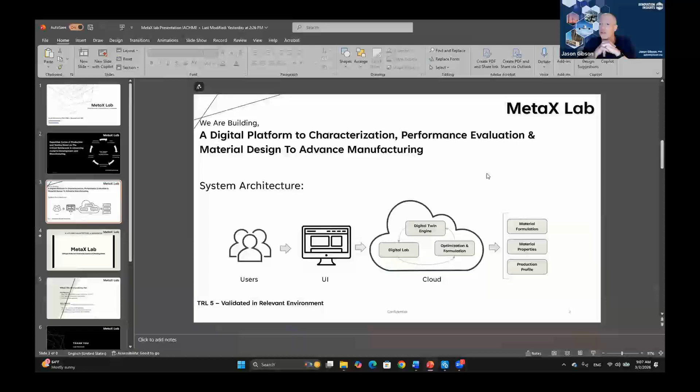Sorry to interrupt, but we don't see any of your slides. Did you want to share your screen? I am sharing my screen. Oh, you have more than one screen. Sometimes that's the issue. Thank you for pointing that out. Do you see my screen all right now? We do, we just see the whole thing. If you put it in presentation mode, we'll see. There we go. Looks good. Perfect. Thank you. Sorry, my computer has so many things running, even though I closed most of them, but this makes it a little slow.

The platform we are developing aims to enable industry users to digitally predict the properties and evaluate the performance of the material. In addition, it enables them to develop new formulations or optimize the manufacturing process, and see and analyze the output before heavily investing in the physical process. We estimate this platform can remove 70% of the manual work currently being done, expedite the whole process, and easily become part of the current workflow in the manufacturing process.

The architecture of the platform is modular, meaning we don't have a generalized model. We have individual modules developed for each material family and each test using advanced computational techniques. The good news is the user doesn't need any skill in simulation and modeling, as the modules are designed to work automatically and provide the required outcome. Users only need to communicate with these modules through a very simple UI, which I'll show you in the next slide.

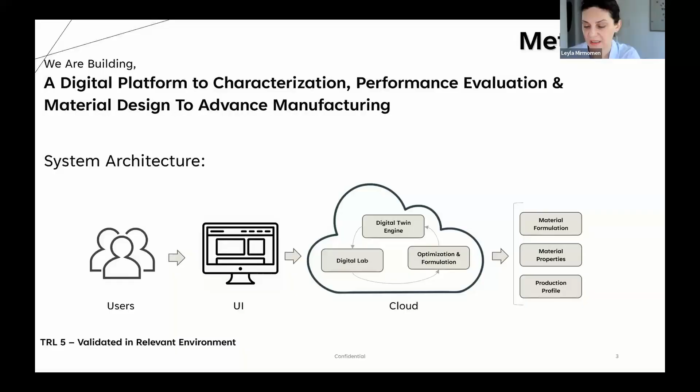Currently we are at TRL5 of development, with focus on reinforced composite and self-healing composite and mechanical property lab. All the modules developed have been validated against experimental data. I would like to stop talking abstractly and actually show you a short video demo of how the tool works, to give you a better idea of what I'm talking about.

Material development and characterization are slow, expensive, and unpredictable. MetaX Lab changes that. In this short demo, you'll see how our intelligent platform builds a digital twin of the material by predicting its microstructure and properties, simulating its performance, and generating complete engineering reports instantly and automatically. This demo focuses on particle-reinforced thermoset composites, including rigid particles and chopped fibers with aspect ratios under 5.

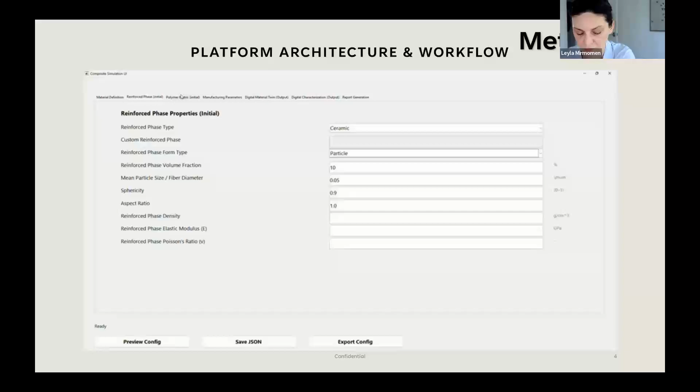With that material system defined, the workflow begins with material definition, where the basic identity of the composite is established. From this point forward, MetaX Lab's multi-layer computational engine, built on the physics and chemistry of cure kinetics, network formation, and polymer behavior, configures the workflow automatically. The next step defines the reinforced phase, where the user selects the reinforcement type and inputs properties such as geometry, stiffness, and volume fraction. Based on these inputs, the platform activates morphology-dependent formulations, reinforcement-matrix interaction models, and dispersion and packing rules that determine microstructural behavior. Next, the polymer matrix chemistry is selected.

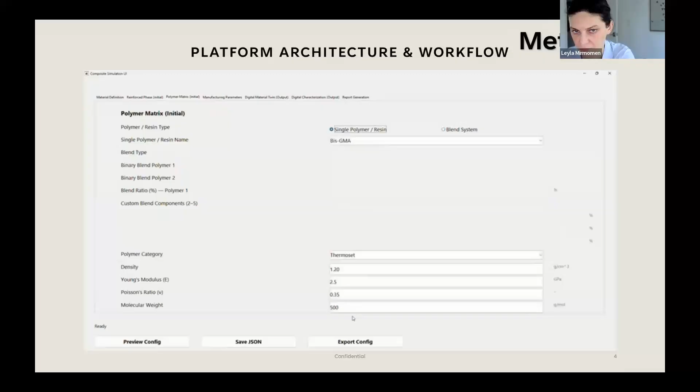This single input triggers the physics engine responsible for cure kinetics, viscosity evolution, modulus development, and chemistry-dependent constitutive behavior. User input is intentionally minimal: you provide the chemistry, and MetaX Lab manages the full multi-layer physics. Manufacturing and curing parameters are then defined, and the platform uses this information to update material behavior throughout the curing process, continuously evolving modulus, interactions, and microstructure as the polymer transitions from uncured to fully cured.

MetaX Lab then constructs a high-fidelity digital twin of the material. Here, the user selects the intrinsic properties and microstructural features to include. The resulting digital twin represents the final microstructure, intrinsic matrix properties, and composite properties at full conversion, and can also capture how these properties evolve throughout processing.

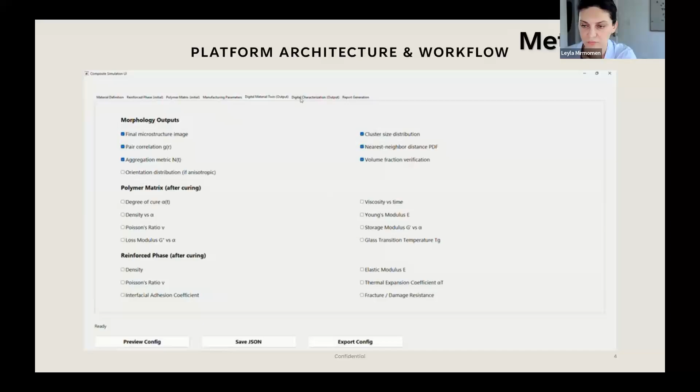The digital twin proceeds to digital characterization, which functions as a virtual testing laboratory. Each test is a digital reconstruction of the corresponding ASTM standard. Users can perform tensile, flexural, compression, shear, fatigue, or fracture tests and define loading rate, environment, temperature, and nonlinear options. MetaX Lab automatically applies the appropriate boundary conditions and loading profiles, runs the digital test, and outputs performance metrics.

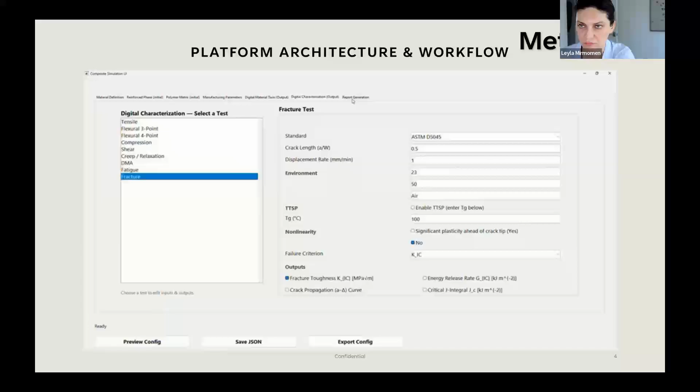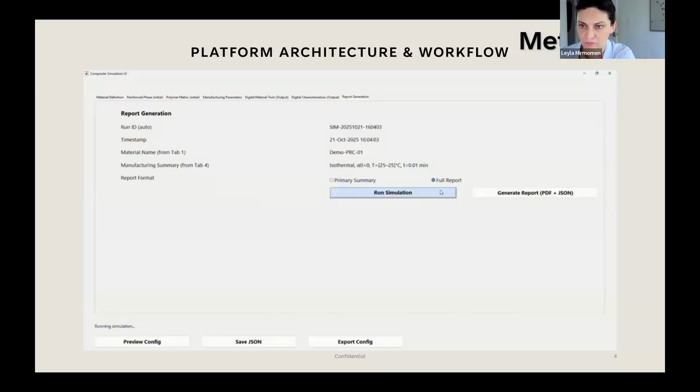Here, the user runs the full simulation and can generate two reports. The first is the morphology report. It visualizes the simulated microstructure and quantifies particle dispersion, clustering, nearest neighbor distances, and aggregation behavior, providing a technical fingerprint of the composite morphology. The second is the full digital twin report. This combines microstructure information with intrinsic material properties and performance metrics, including flexural modulus, strength, maximum deflection, and the complete load deflection curve. All algorithms and outputs shown here have been validated against experimental datasets for this material family.

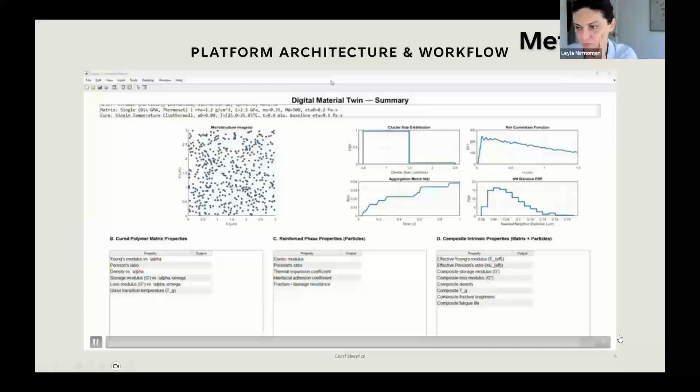Accuracy and tolerance ranges are updated continuously as new data are incorporated. MetaX Lab delivers a physics-grounded, autonomous workflow with minimal user input, enabling faster development cycles, reduced cost, and deeper insight into material behavior. Upcoming modules include a formulation design station, where target properties define the required formulation, and additional tests such as fracture toughness, further expanding the platform's capabilities.

Material development and... I'm sorry. Before I stop my talk, I just want to say that what we are looking for at this point of our development, and I hope that people who are listening find alignment with us.

All right, thanks a lot. Give me just a minute. All right, bear with me. Do you got the notes page this time, Jason? We got the notes page, so you'll need to swap it real quick, swap it again here. There you go, looks good. Perfect, thanks, Jeff.

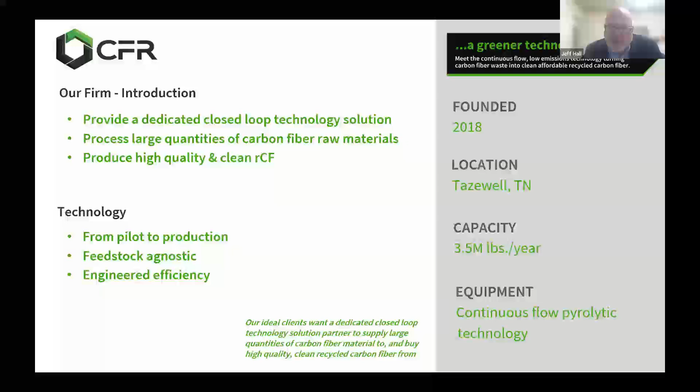That kind of leads to the supply chain side of things. So what we offer is supply chain stability. Since we have access to large amounts of domestic feedstock materials, the RCF we produce is not tied to global economic pressures. I think anybody that works with carbon fiber understands that can be a little bit of a challenge, especially faced with some of the things we're faced with right now.

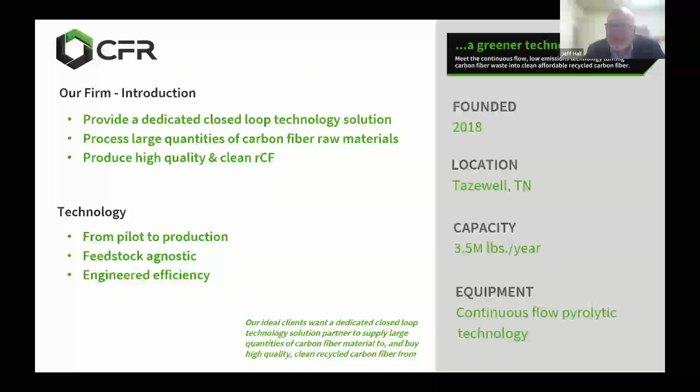And then lastly is just the scale, the sheer scale at which we operate. At our current location, we can produce north of 3 million pounds of RCF. That's 3 million pounds of material that we can recycle or more, right? But we can also produce over 3 million pounds of clean RCF that can be commercialized and then utilized for other applications.

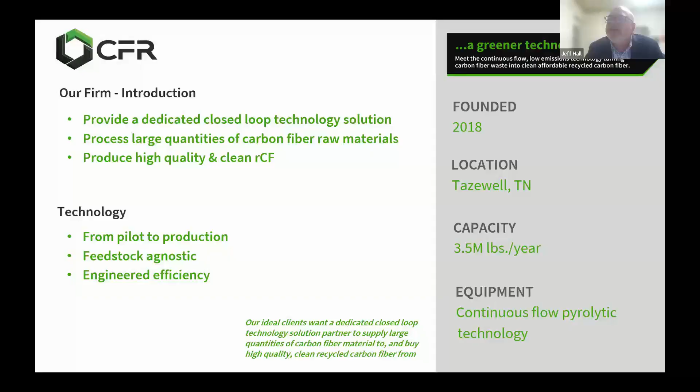So we'll kind of move over and jump into the product side of the fence, and this is where it might get tricky. Bear with me while I try to change tabs. Did that change for you guys? Okay, yep, yeah, it looks like it did. Okay, great, thank you.

So as you guys know, developing recycling solutions is a two-sided coin, right? On one side, you've got the recycling aspect, but on the other side is the commercialization of the raw material, or the material that you're getting out of the recycling piece. And you need both sides to be successful.

This material is comprised of liberated fiber from various feedstock supplies, for example, high pressure vessels, hydrogen, compressed natural gas tanks, race cars, aerospace, cured composites, a lot of the stuff that gets recycled. As far as the attributes of that material go, it maintains the attributes of the original base material.

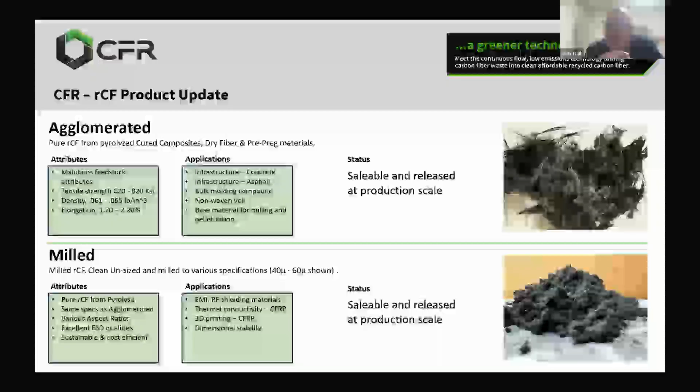So our agglomerated material can be used as-is for applications like infrastructure applications, for example fiber reinforcement for concrete and asphalt. We also use this material as the base material that we create other materials out of.

For example, if you look at the bottom of the page here, you're going to see our milled RCF. This milled RCF has all the same attributes as the agglomerated RCF, but it can be milled to various aspect ratios.

One thing that makes it unique is the fact that it has no sizing on it, which gives it fantastic EMI and RF shielding capabilities.

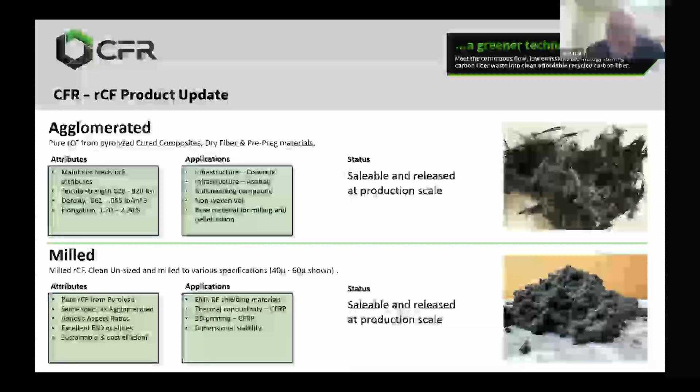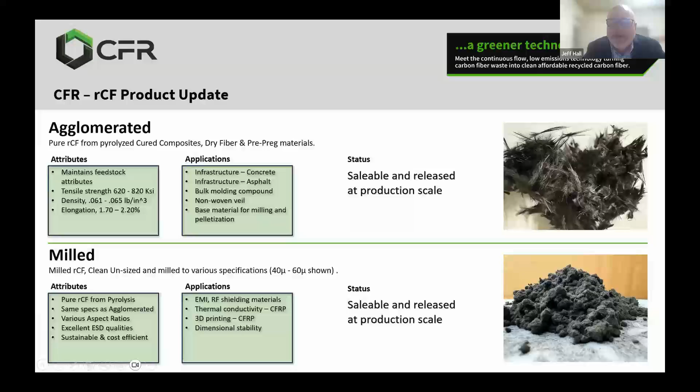We've been doing some work with Sandia National Lab that kind of reinforces that statement, and we've got some technical data that we'd be happy to provide to anybody that would like to learn a little bit more about some of those results for EMI and RF shielding.

So both of these products you see here on the page are available and sellable, released at production scale today.

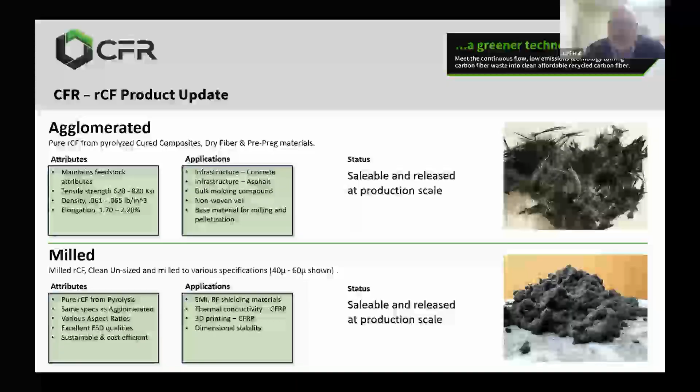Moving on, one other thing we're excited about, you may have seen some of this in the news, is our relationship with James Cropper. James Cropper has been able to take our recycled carbon fiber and utilize it for non-woven veil applications.

I'll let James Cropper speak to all the attributes and wonderful things about their non-woven veil, but I will share with you some of the applications here: aerospace interiors, advanced air mobility, automotive panels, and sporting goods.

James Cropper has also got a new product. They have their standard non-woven product, but they've also been able to align the fibers to create semi-structural properties, which is also pretty exciting.

If you'd like to learn a bit more about what James Cropper is doing, I've got a link to their website here, and I'd also be happy to make an introduction. If anybody wants to reach out to me, I can introduce you to the people that we're working with over there to answer some of your questions.

And then lastly, from a product development perspective, we're also very excited to talk about our pelletized RCF. So what we've done is we've taken our standard agglomerated fiber and we've pelletized it primarily for the purpose of increasing the bulk density of the material.

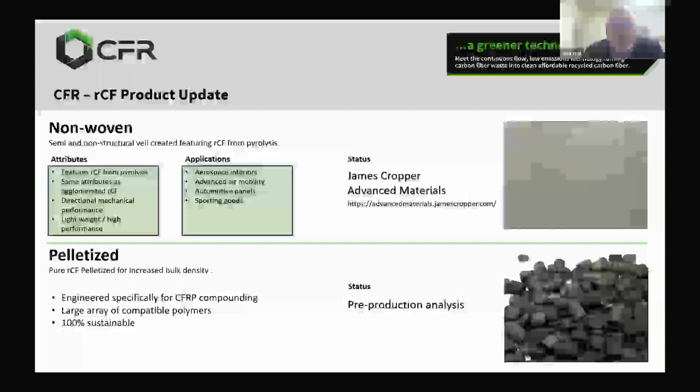By going in and increasing the bulk density of the material, we've taken that challenge away. Some other features of this material are the various fiber lengths within this pellet, some as long as 8 millimeters that we've measured. By having the various fiber lengths within the pellet, you're able to attribute certain properties that you would get from the various carbon fiber lengths within the compound or polymer you're working with.

We also apply sizing to these pellets. So what you're looking at in this image of the pellet, there's no binder material there—outside of the sizing, there's no polymer holding that pellet together. It's essentially pure RCF with the addition of around 1.5% sizing, which makes this pellet compatible with a very large array of different types of polymers.

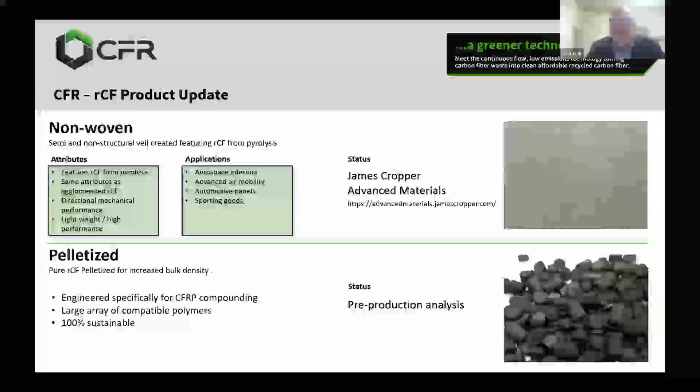So of course, as we mentioned before, this material is all 100% sustainable, and you also get that supply chain stability benefit from utilizing RCF as a carbon fiber reinforcement in a polymer.

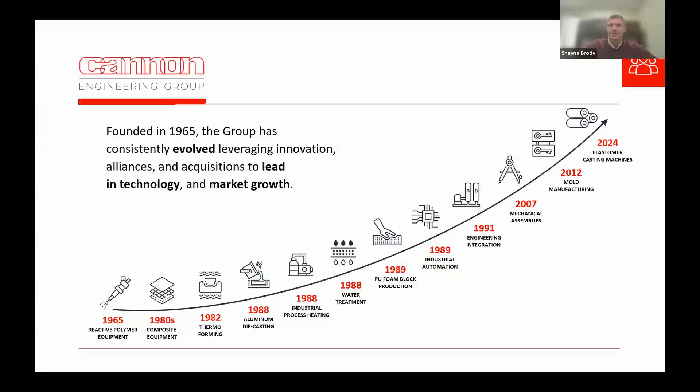The Cannon umbrella is far-reaching across the globe. We have numerous branches, some specialized within Europe, the Americas, the Middle East, and Asia.

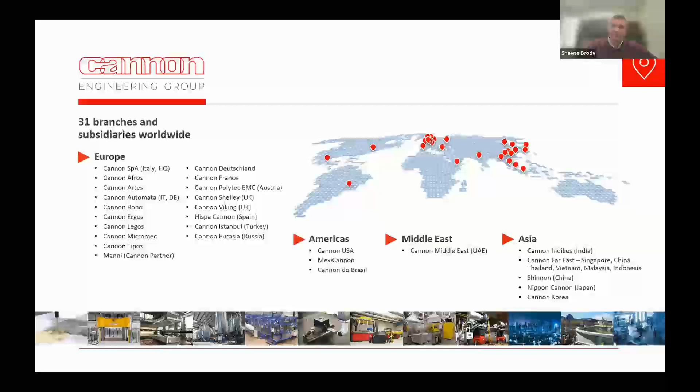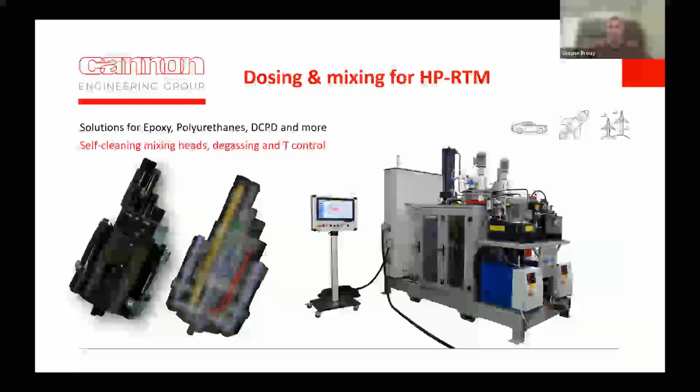Now I'll start with our equipment. The first one being our bread and butter, the high-pressure dosing machines and high-pressure mix heads. These systems can be applied to many processes, including HP-RTM, or high-pressure resin transfer molding, for chemicals including but not limited to epoxies, polyurethanes, DCPD systems, and many others.

Actually, a version of this machine will be used at IACMI's SURF facility, or scale-up research facility, in Detroit for HP-RTM prototyping using DCPD chemistry.

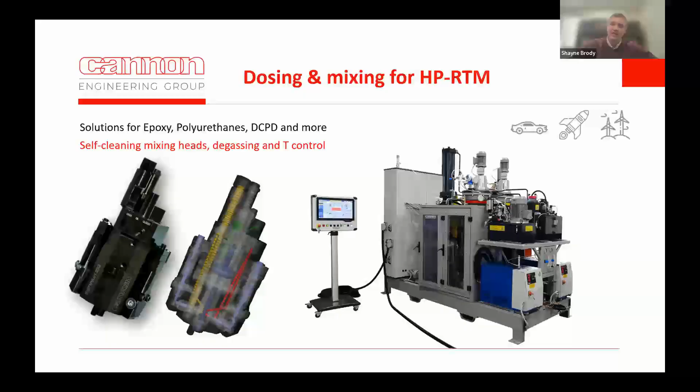The mixing head applies to HP-RTM. This is a process in which a dry preformed material is put inside of a mold cavity. A press clamps the material in place and adds pressure resistance within the mold. Then a dosing system is connected to it and will inject a 2 to 3, maybe more, component resin system inside of the cavity.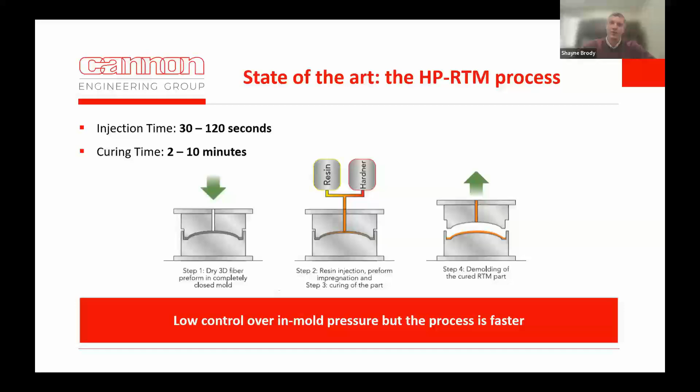Just one thing to note: after a few minutes after pouring, the material within the part can be cured and removed, and this is a lot different from the several hour process for standard methods.

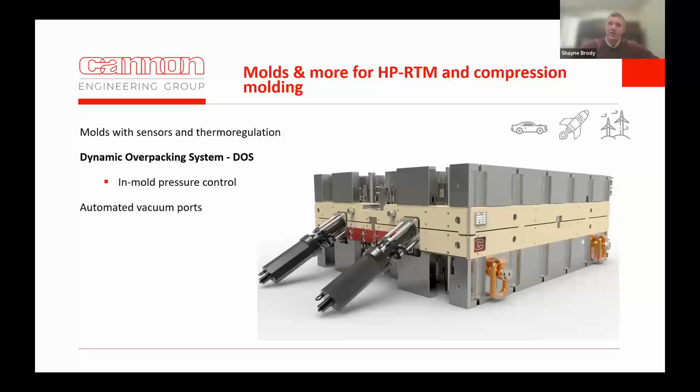In addition to this, we have the ability to produce tooling for aerospace and composite applications and other applications. In addition to the metering system and tooling, we can supply additional ancillary systems to complement the process. One example would be the dynamic overpacking system that we'll talk about a little bit later.

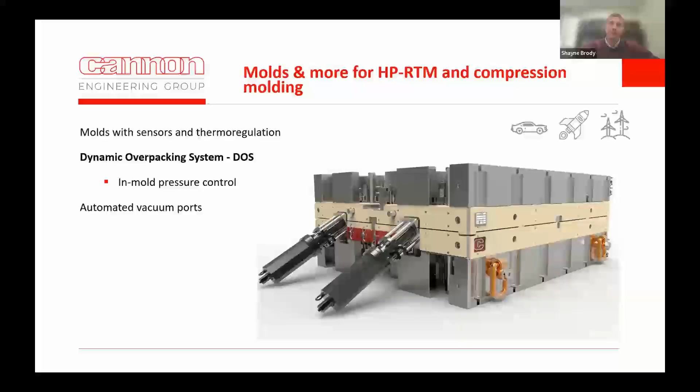Along with our metering equipment, we manufacture high tonnage presses with very good characteristics that allow us to be more effective in the composite market.

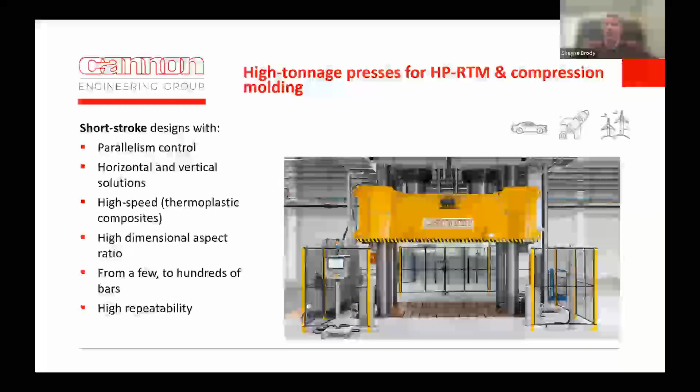For example, our parallelism control built into the press system is one aspect that adds a lot of accuracy and repeatability to the process. And repeatability is very, very important, especially in aerospace, where precision could mean life or death, or significant cost and loss of material and time.

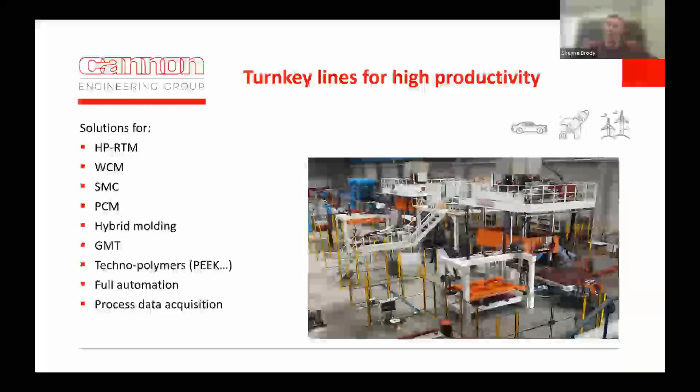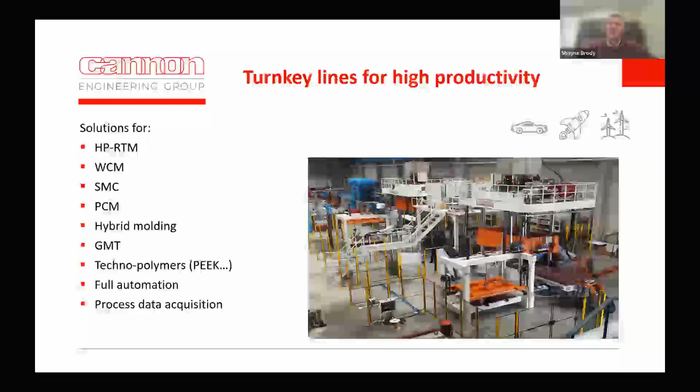Through automation, we can attain a higher degree of accuracy and repeatability in the process and final products. With that in mind, we can supply complete turnkey lines and systems for a multitude of processes, products, and compounds, some of which include HPRTM, wet compression molding, sheet molding compound, pre-preg compression molding, glass fiber reinforced molding, and many others.

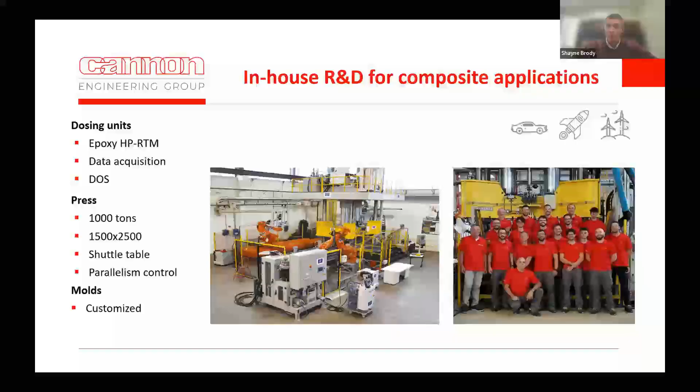We also have a dedicated R&D team and a fully furnished lab, including customized molds and tooling to fit your product, where we can trial most chemicals, processes, and applications.

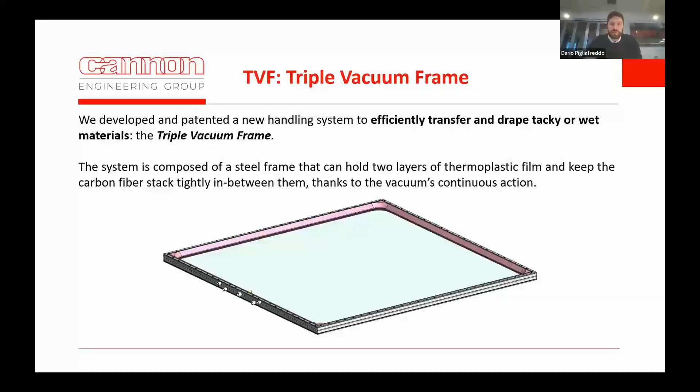We also apply vacuum in between the two thermoplastic films in order to maintain components inside of them. This is an example of this frame, some pictures of it. In between the thermoplastic films, we can place, for example, a pre-preg material, and we can use this frame to transfer it in an automatic plant from the beginning to the end of the process.

What are the advantages of this TVF? First of all, as anticipated, it is fully automatable, so we can integrate it into a line and move and transfer the pre-preg material from the beginning to the end. It has a lot of preforming capability thanks to the stretchability of the material and thanks to the vacuum that we have between the two layers of thermoplastic film. We can remove air from the pre-preg material itself.

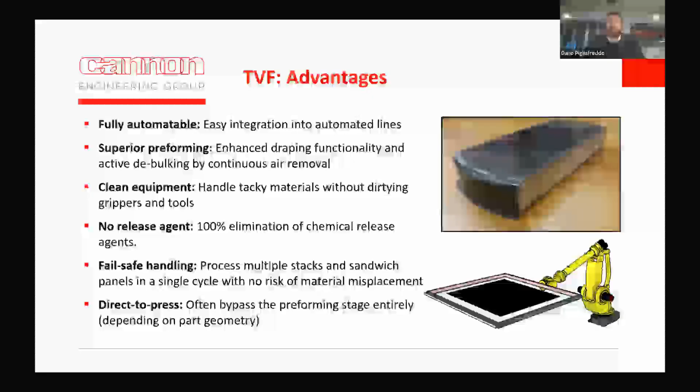It is clean equipment because, being the pre-preg, the tackiness of the pre-preg is contained within the two films. This allows us to avoid dirtying grippers, for example, or transfer needles. It also means we can avoid release agent when we have a preforming tooling. It's very safe for handling complex geometries and complex stacks of material, because we avoid misplacing components like cores or sandwich structures, and we maintain the correct fiber orientation, as an aeronautic process should do.

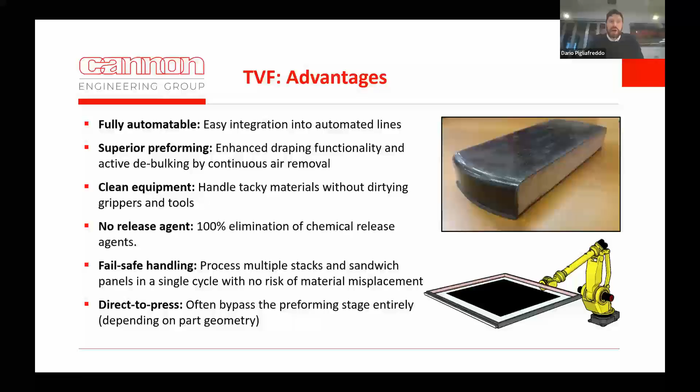In some cases, we are also able to skip the preforming phase and move the pre-preg material directly to the pressing stage.

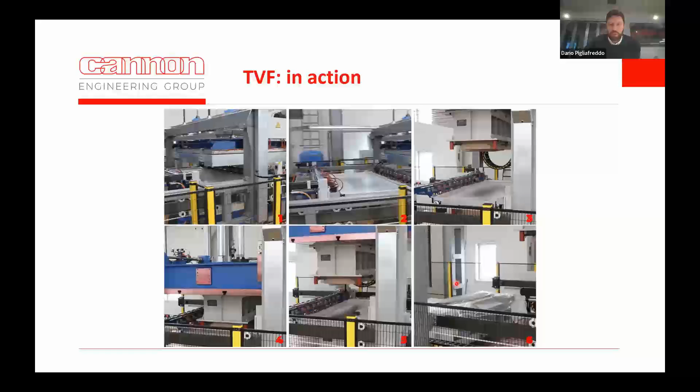These are some images to better understand how it works. From the left, we have a compact oven heating up the material and the thermoplastic film. We have a transferring phase where we bring the material under a preforming press, where we have a tool. We do the preforming phase under the tool, then demold and move the grippers back to the first phase. The film contains the material in a second stage, protecting it, and you can peel it off manually when you need to use the prepreg preform for the second stage.

Let's now discuss the second technology, which is quite interesting for aerospace application: the DOS, or Dynamic Overpacking System, a device which is able to control cavity pressure, transferring this concept to HPRTM.

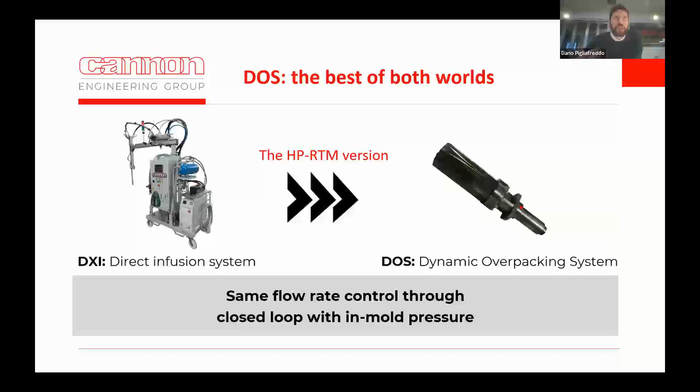On the left you see the direct infusion system. On the right you see the Dynamic Overpacking System, which is basically an accumulation device able to re-emit mixed resin at a defined flow rate inside the cavity of our mold. The flow rate is defined by something we set in terms of in-mold pressure, which can now be whatever we want, not just limited to 1 bar, but we can arrive, for example, at 100, typical HPRTM pressures.

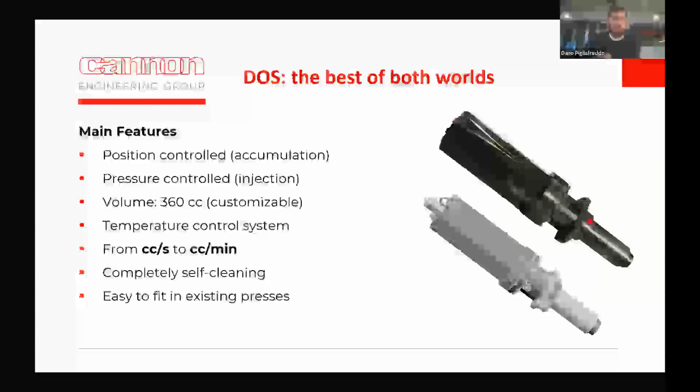The main characteristics of this device are that it's position-controlled during the accumulation phase, but pressure-controlled while injecting the material into the cavity, in closed loop with the pressure inside our laminate, for example. The volume is around 360 cc, but can be changed, and it is temperature-controlled, meaning we can keep it cold while gathering resin and heat it up when we have to cure it at the end of the process.

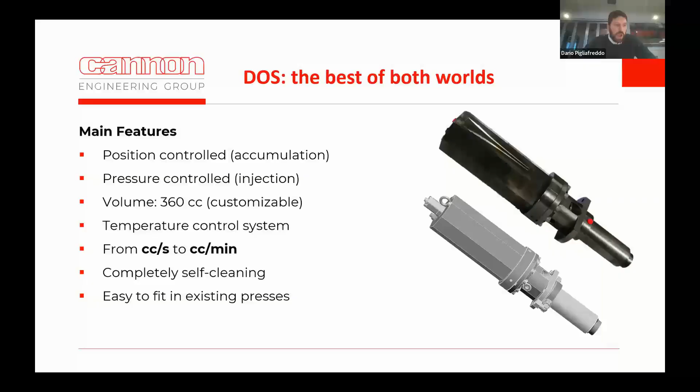In terms of flow rate, we can go from a few cc per second down to a few cc per minute, which is very important to finely control the process in terms of pressure. And it is completely self-cleaning, meaning we don't have to use solvent or any other consumable materials to operate it.

This is the 3D model of a real mold that we made for a customer. On the top here is the injection mixing head, which delivers the material to the mold. These two are the two dynamic overpacking cylinders, which are going to pressurize the cavity inside the mold. In this case, the mold contains 8 cavities, all kept pressurized by these two DOS units.

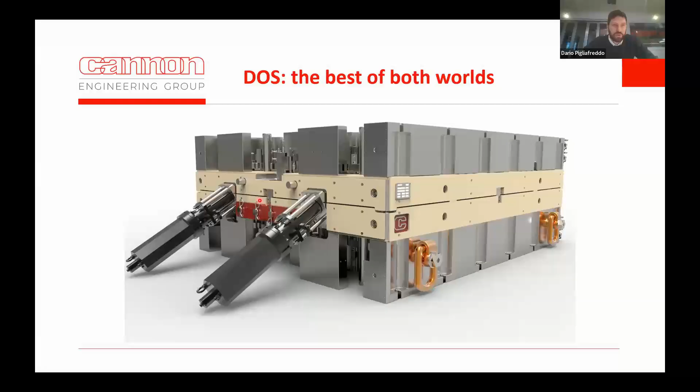Now, to better understand what happens during an actual injection, I'm showing an example of a pressure profile in a real component. At the beginning, you have the start of injection, opening the mixing head, with a slight increase in pressure because, as mentioned, the reinforcement resists the flow of material. At a certain point, you'll have a peak of pressure because there's no more space for the material. In a normal HPRTM process, you would close the mixing head here.

But in the DOS application mode, you open the DOS, the pressure decreases, and you keep injecting. At a certain point, the space in the DOS will also finish, and you'll have a second pressure peak at this position. You close the injection head, and then let the dynamic overpacking system do the work, maintaining the pressure at a value we define—in this case, for example, 40 to 50 bars.

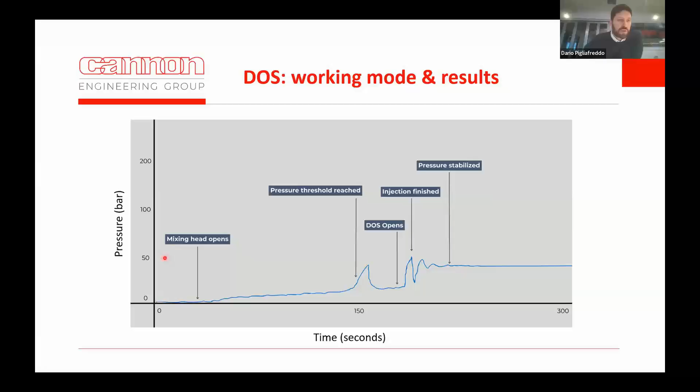This is an example of a component made with and without DOS. Of course, typical HPRTM parts look much better than the one here on the left, but in this case, we were using a high TG and high shrinkage resin rated for aerospace application. So in some cases, the DOS is crucial even without the need for fragile inserts management.

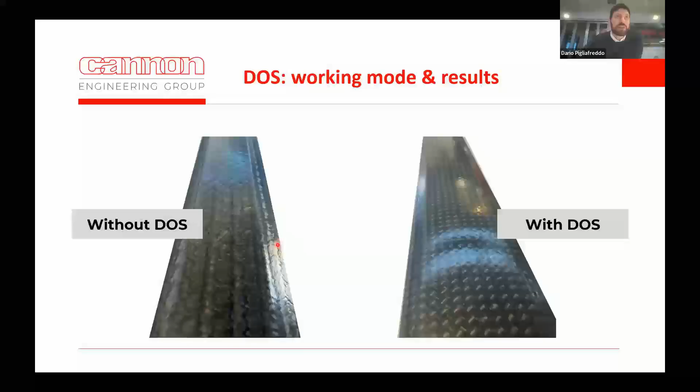To summarize what we said until now, we are able to combine the advantages of both HPRTM and vacuum RTM because our target is to actively control the pressure inside the mold by changing the flow rate. Our target is to be able to manage fragile inserts. We want to avoid fiber washout, and we want to compensate for chemical shrinkage after the injection is finished. Then we reach, of course, as an objective, less void content. We have better mechanical properties. We arrive to 60 to 65% of fiber volume fraction, which for HPRTM is a lot. And we also have better aesthetical properties, as you have seen before.

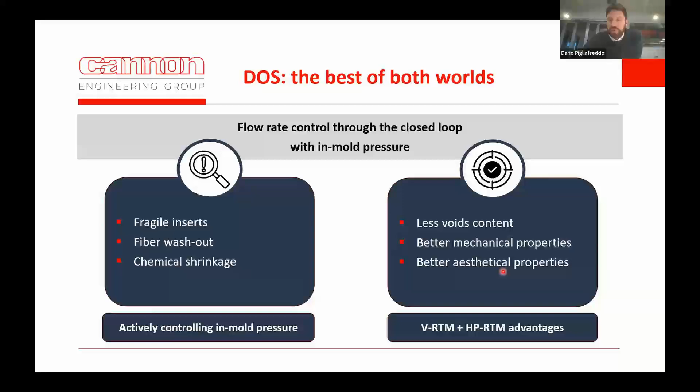Well, thank you, Dario and Shane. I have a few questions for you. I'm really impressed with the overpressure system. You talk about how you get lower void content with it, obviously better aesthetic properties because of the shrinkage aspect. Would you say you are approaching the same type of physical properties you get with a pre-preg material in an autoclave that's processed under pressure? Or is it still shy of what you can get with a pre-preg in an autoclave?

I think we are slightly shy of this, but we have seen, for example, CT scans of our components made in an aerospace and aeronautic setup, and it is very, very good. So probably working a little bit more on this, we will be able maybe to reach something close to pre-preg mechanical characteristics, let's say.

And then have you tested with all different types of resins, epoxies, urethanes, and DCPDs, or? Yes, we did. Let's say that the main advantages are where we have high shrinkage rates, so it really depends on the chemical system. In some cases, it's not necessary to use the DOS. In some cases, it's absolutely necessary. We have seen a lot in epoxy. Something could be for the DCPD as well, and polyurethane in some cases as well. Okay, but whatever we put inside, more or less, is the same. Then the effect is different.